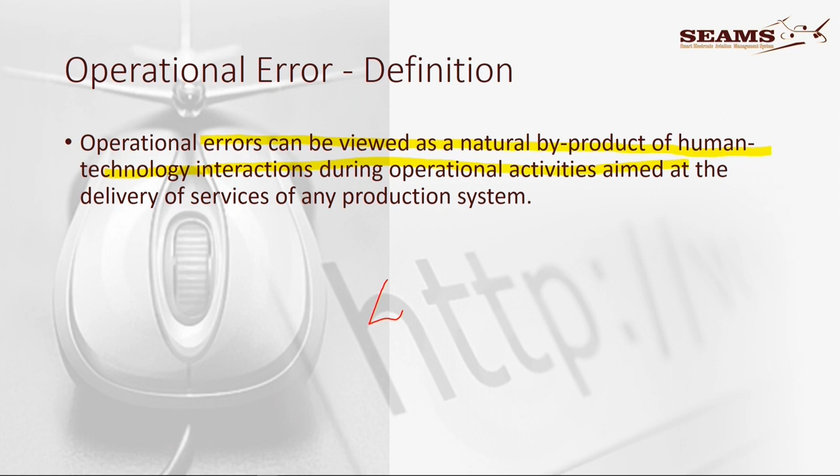Operational error, when I look at what is operational error, can be viewed as a natural byproduct of human and technology interaction. Remember that in the SHEL model, we had the liveware in the center, and we had software, hardware, environment, and then liveware. The interfaces was happening between the center and each part as we go there.

Now remember that the interface between humans, that's obviously the liveware part, and then we put here the liveware part with the hardware part. Hardware part, those are the tools that we've got to operate with on a daily basis.

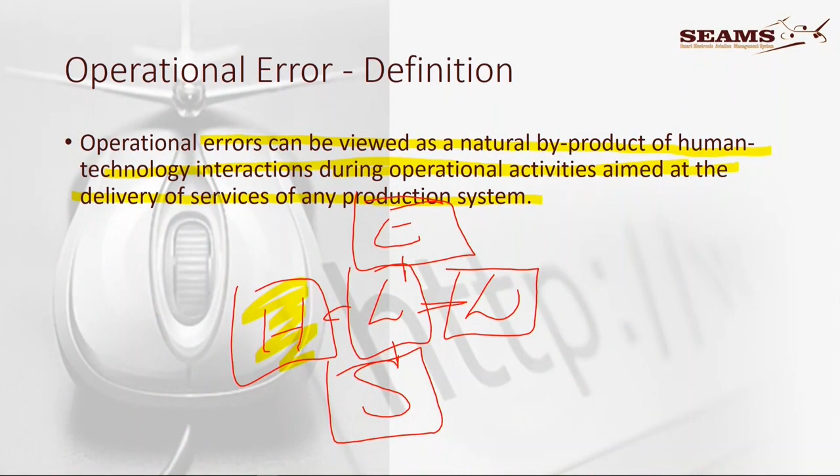And there's a couple of rules nonetheless during operational activities aimed at delivery of service of any production system. In other words, whether that is a production system when we are going out to fly a sortie, or whether it's on the factory floor, it doesn't matter. It is when man and machine, or liveware and hardware, has to interface.

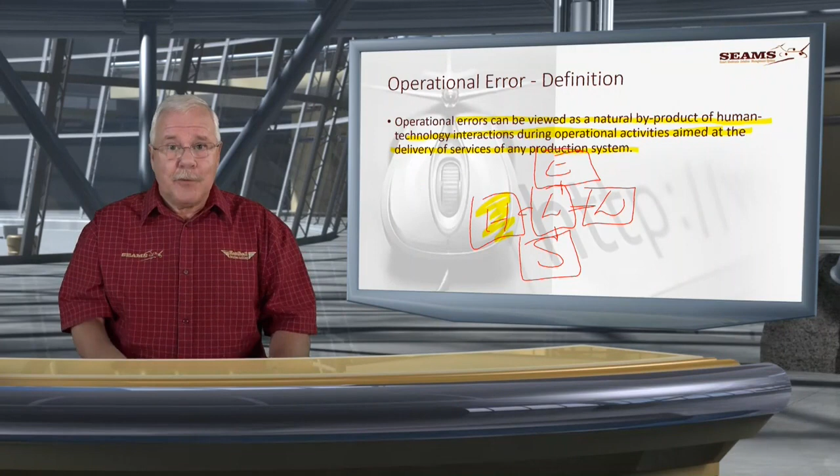And that, by the way, is the origin of human factors. That's where the term human factors was coined, when we said, okay, but why have we got this interface problem? And the only reason we've got that is because we're human. At this stage, obviously saying that there's no other conceivable or technical reason.

Obviously, if there's a technical reason, it could be an error that has happened before, poor, shoddy workmanship, or whatever. Or if for some other reason, during final approach, we don't check that we've got undercarriage, we don't select the undercarriage. And that's the kind of operational error that I would like to talk about today.

The nature of operational errors: just a couple of points, they're accepted as a normal component of any system where humans and technology interact, and operational safety strategies are put into practice to control the operational errors. It's a normal component, and we've got to make peace with it. In fact, there are thousands or millions of operational errors that are made every hour, every day.

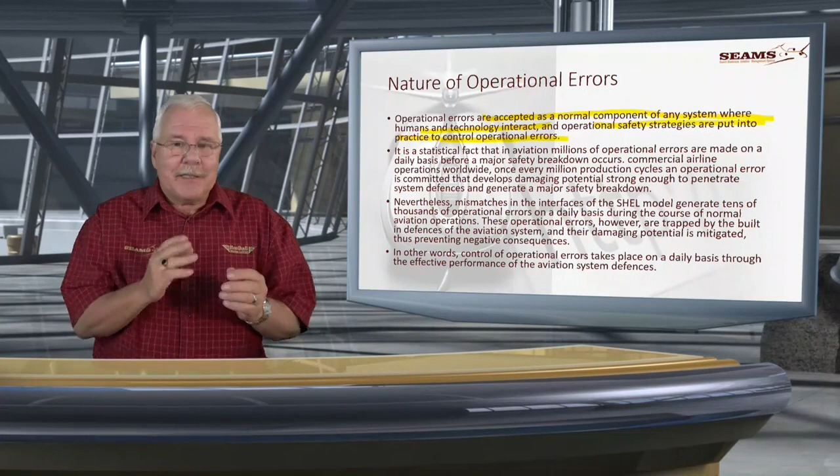Humans, we normally err 1 in 1,000 times. So every 1,000 things that we do, there's something that we have an error on. It's not something that we want to do, it's not intentionally wrong, it's not that we've got a bad attitude or anything. It is just an honest mistake. Those happen quite a lot.

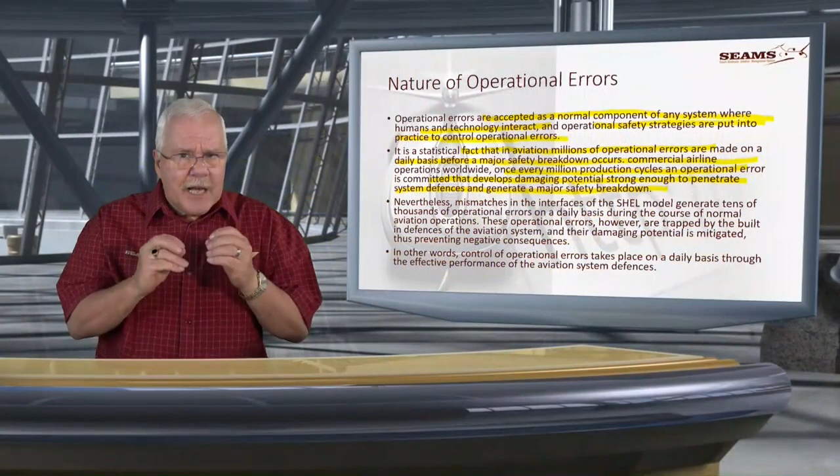So not every operational error will lead to disaster. It might lead to small deviances, small problems, something that can be handled and picked up, something that's not necessarily going to make a change.

But that is the problem. Not having undercarriage selected, well, that is a problem. Not being able to select undercarriage, that's a huge problem. The one is that you know that you're not going to necessarily have undercarriage, and the other one you don't know that you do not have undercarriage. And that actually puts you at a greater disadvantage.

Nevertheless, mismatches in the interface as with the SHEL model, and I've just done that - thousands of operational errors on a daily basis during the course of normal aviation operations. So we make a lot of mistakes. These operational errors are trapped by the built-in defenses in the aviation system, and their damaging potential is mitigated, thus preventing negative consequences. And this is quite important.

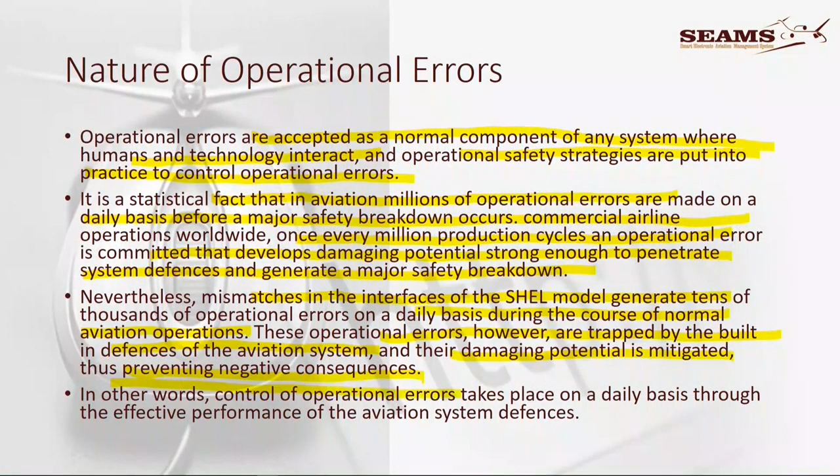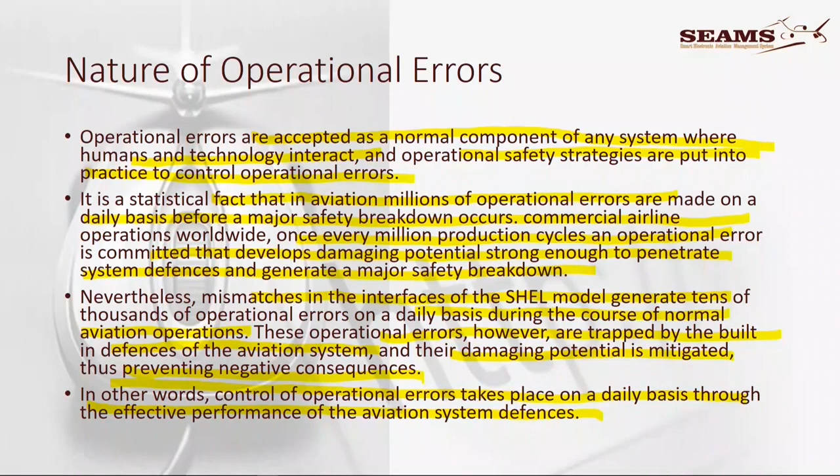Right from the word go, what is it that in the aviation industry we do to ensure that once we've made an operational error, we can become aware of it? Or is there something that can catch that error, confine it, and limit the consequence? That's one of the things we have to talk about. Operational errors take place on a daily basis, and effective performance of the defenses.

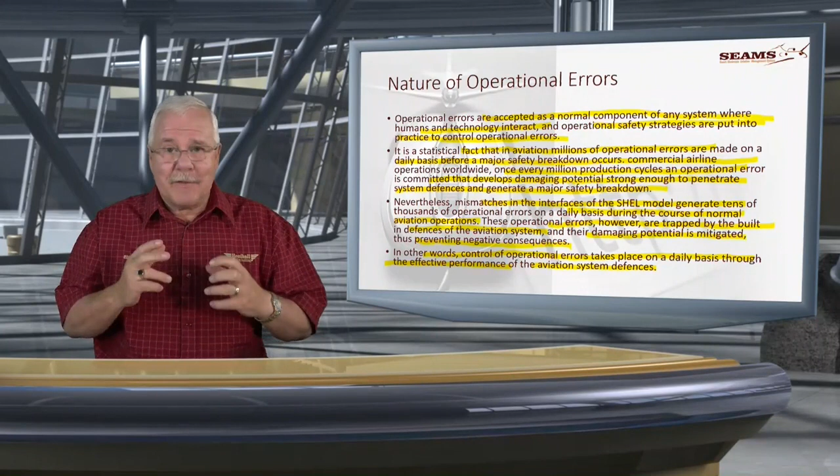The last one we're looking at here says control of operational errors takes place on a daily basis through the effective performance of the aviation system. That is a mouthful. It means that even though the system is effective and we've got the right stuff going, it is very difficult to have any flight operation or procedure without small errors creeping in.

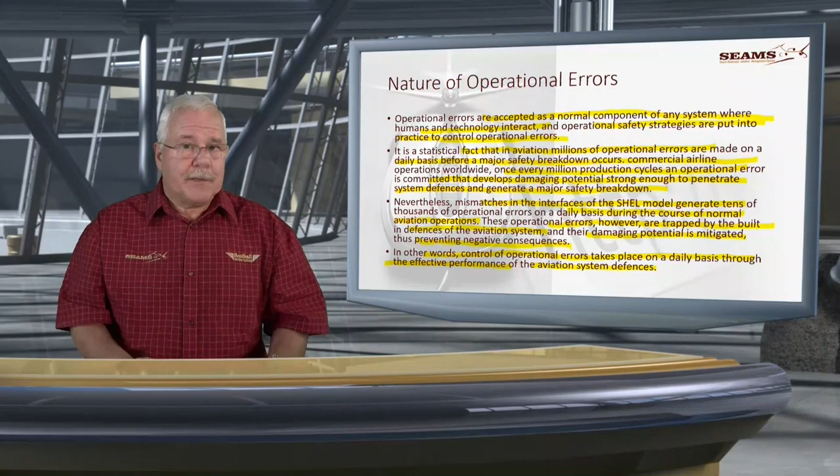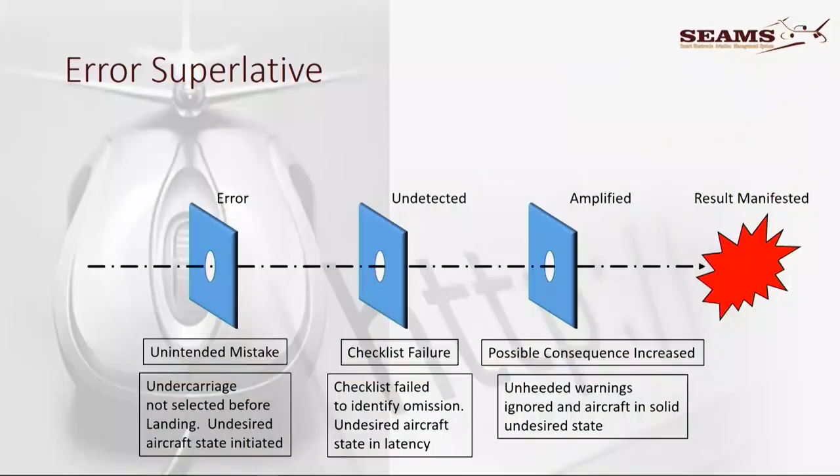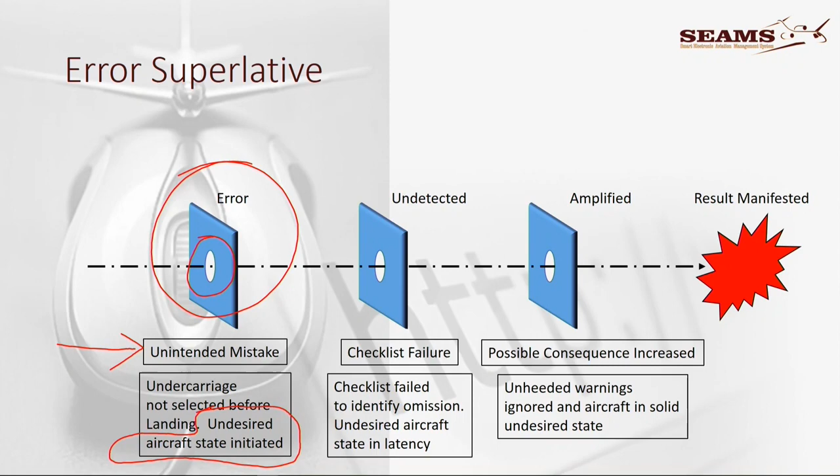Start off with the error. The only reason I've got a hole in the center there is to show that the error was not captured. In other words, there is an unintended mistake. It's not really a transgression. We just forgot to put the undercarriage down, okay? Give me a break. Undercarriage not selected before landing, and that put the aircraft into an undesired state. The undesirable state of the aircraft is now initiated.

Right, so you're sitting on downwind. For some or other reason, you got distracted. I don't know what you were doing, but you just simply didn't select the undercarriage down. You did the rest of the power settings, you put the flaps down, you did everything. You didn't notice that the aircraft was performing a little bit better than normal, because you didn't notice that the reduced drag of the wheels actually made an inch or two manifold pressure difference.

You didn't notice that it made a speed difference, and you didn't notice that you actually used less power. In other words, you are totally unaware. Remember, the moment the error is made, it goes into a latency state - it's lying there dormant. It's not shouting at you, not yet.

Because, having not selected the undercarriage down, you didn't check for the green, and you didn't check for the mechanical indication, or outside, in the Baron's case, where there's a little mirror on the wing to show if the nose gear is out. By the way, all these things are taught. But somehow, for some reason...

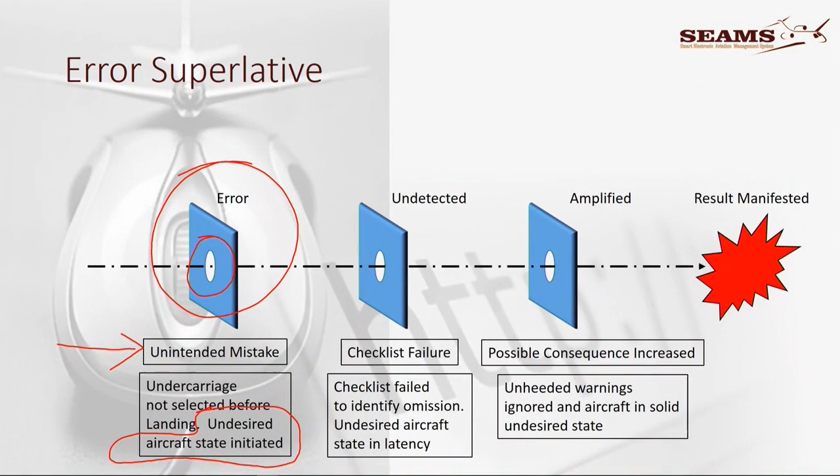The next thing is the error is now undetected. How do we detect errors? Here you can look - I said the checklist failure. Remember that we use checklists, SOPs, not little rhymes. We've got sequences of doing things, and we hammer it into the heads all day.

Every time we fly, this is what you do. On downwind, the first thing is you do your radio call. Next, you set the power. Next, brakes, undercarriage down, and wait for it - cloop, cloop, cloop, 3 greens we've got. Check outside indication, green light, mechanical indication. And now you carry on setting the mixture, the pitch, the throttle for the condition.

So there's an absolute sequence that we follow. It's not a sequence that we follow maybe now and then. Flying does not work like that. The moment you fly and do not follow the absolute sequence anymore, you're looking for trouble.

What makes you so good? Well, all right, never mind.

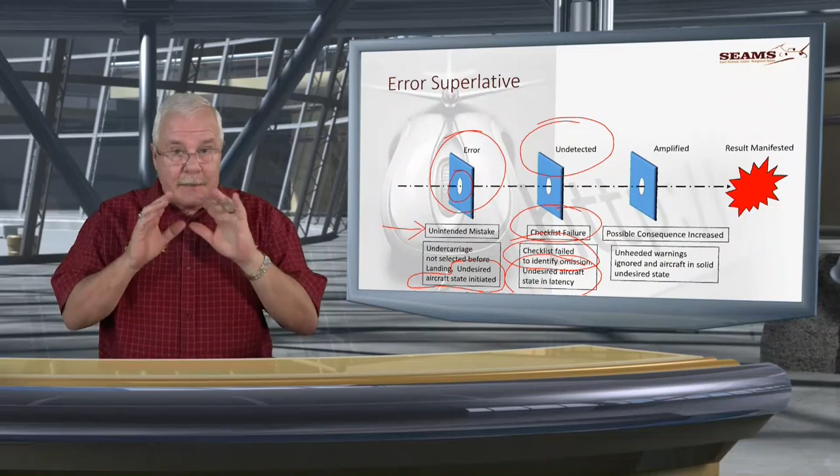Checklist failed - in other words, if we didn't use it, now the aircraft is definitely in an undesired state, and it's getting fully into the latency state. It is now there. The first time you made the error, the second time you compounded the error by not picking it up due to the correct procedures, and then you amplified the problem. What is that? There is a possible consequence that is increased.

How's that possible? You talk here about unheeded warnings. It simply means a warning came into the cockpit. For instance, the red light showing for the undercarriage is an unheeded warning because we didn't pick it up, and the warning is there. Maybe the undercarriage horn is blowing, but you are so distracted that you actually don't hear it.

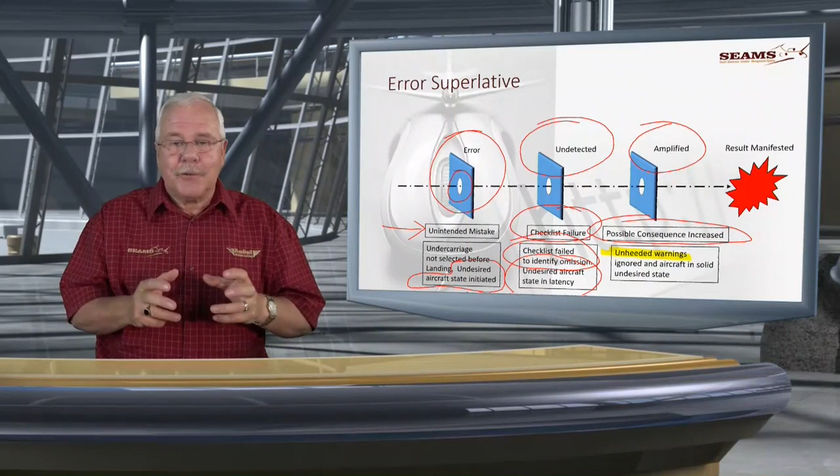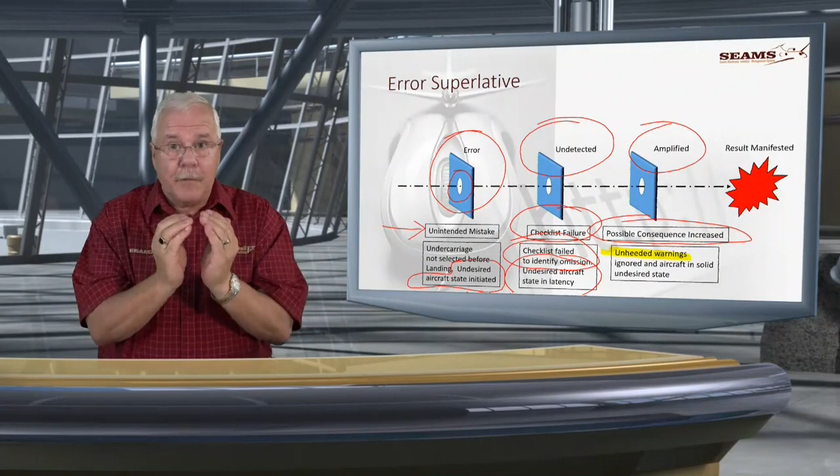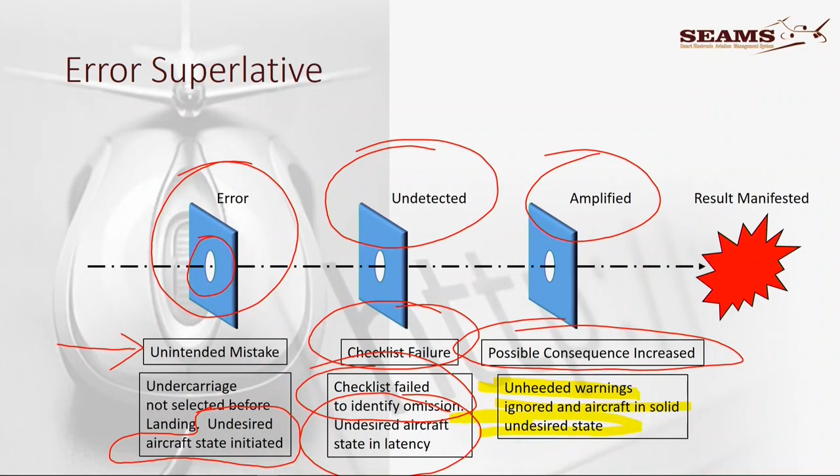Don't even think for a moment that you were created above that kind of mistake. It's simply not true. It is easy to distract someone to the point where, in their peripherals, they don't see or hear, but they are so focused on that which is seemingly important at that moment in time. So it is ignored, and the aircraft is now in a solid, undesired state.

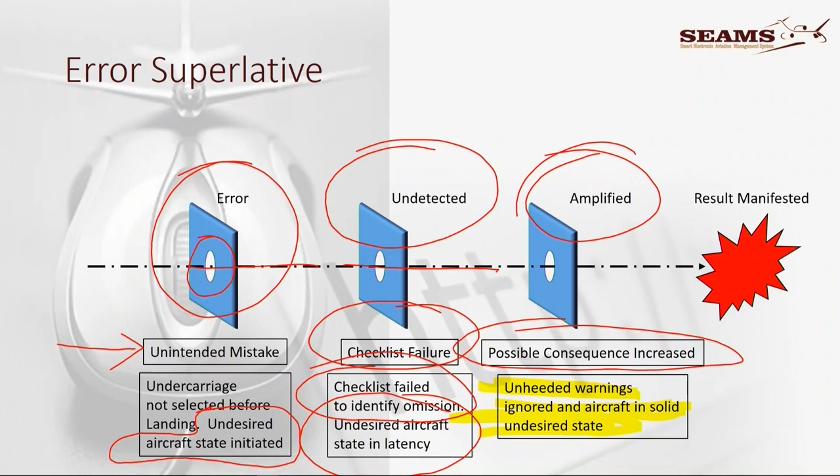Still, if you look right through, it popped through that hole, it popped through there, it didn't stop there, and the things that could have stopped it actually now compounded the problem even further. There's now a certain amount of inevitability to this.

We are now on final approach. We do not see that there's anything wrong. It is undetected, and on we go, and it's now amplified to the level where, remember, at this stage of the game, there's been no consequence. In terms of flight safety, on downwind, on base leg, on final, there's still no problem - until you're going to make contact with Mother Earth.

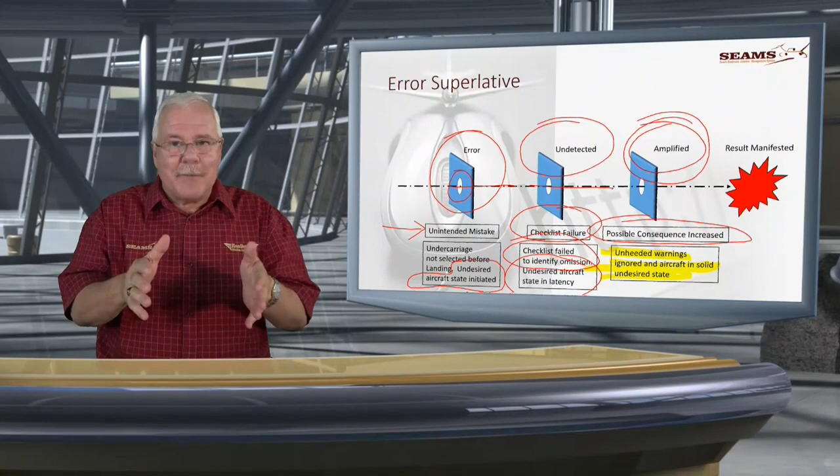So now we just hope and pray that somebody's going to pick up that the undercarriage is definitely not down. I'm not one of the guys listening to the clips on YouTube where you can hear the hooter screaming, but both people are so mesmerized by something that they don't see where they're heading.

All right, if we look at reasons for the error induction, this is where we've got to pay attention, because this is exactly the problem. Distracted attention - and I can tell you now that distracted attention is the number one cause.

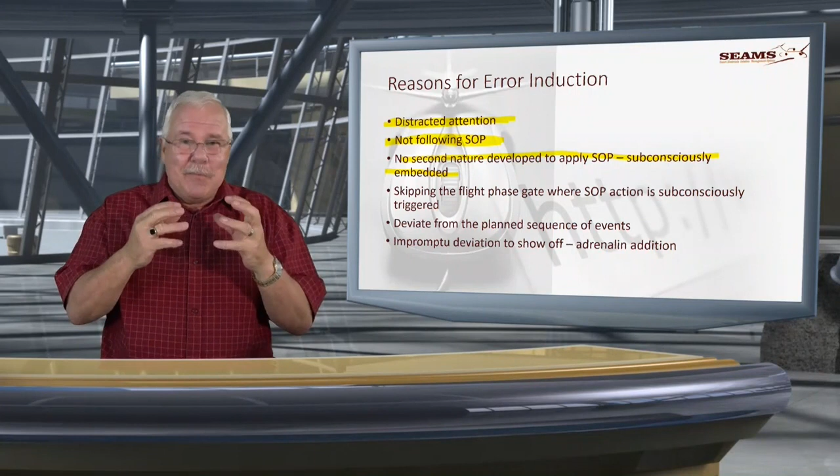Even today in the Harvard, if you wanted to, after takeoff, get the undercarriage up, you would apply the brakes, and then you would have to energize - push down a lever to energize, to get hydraulics into the system, and then undercarriage up. So even today, when I sit there after takeoff, I say brakes, energize, undercarriage - it's 1,800 hours on the Harvards that ingrained that into me. It's difficult for me not to say energize.

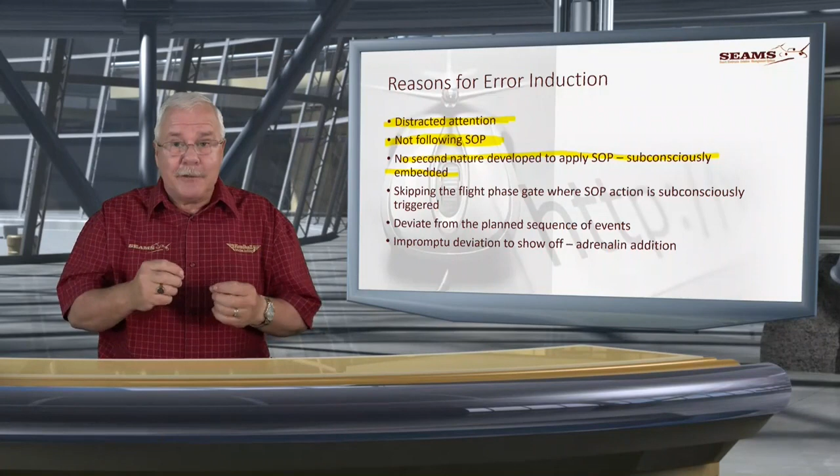It's just ingrained. Now imagine, this luckily is something extra that's ingrained as a single pilot. In a multi-crew, we do call-outs, we do checks, and we don't let it go over just to memory. But in this case, memory is what is happening.

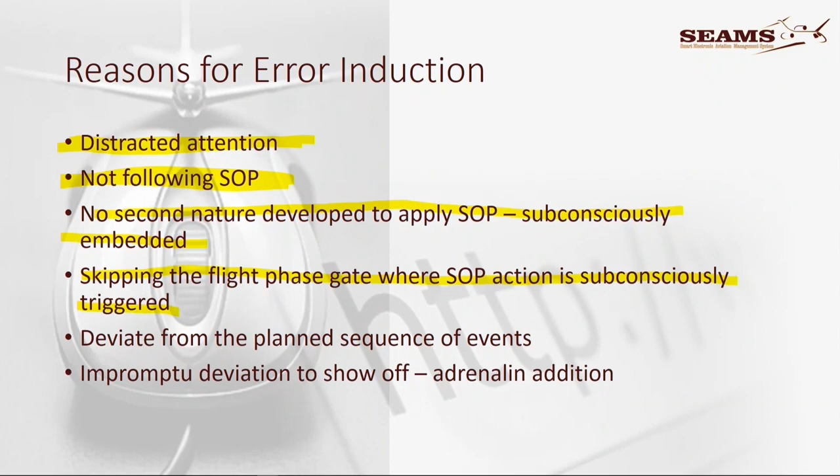Skipping the flight phase - ooh, okay. Now, what is the flight phase gate? When we approach an aircraft, when we approach a runway to land, there are 3 places that we normally join.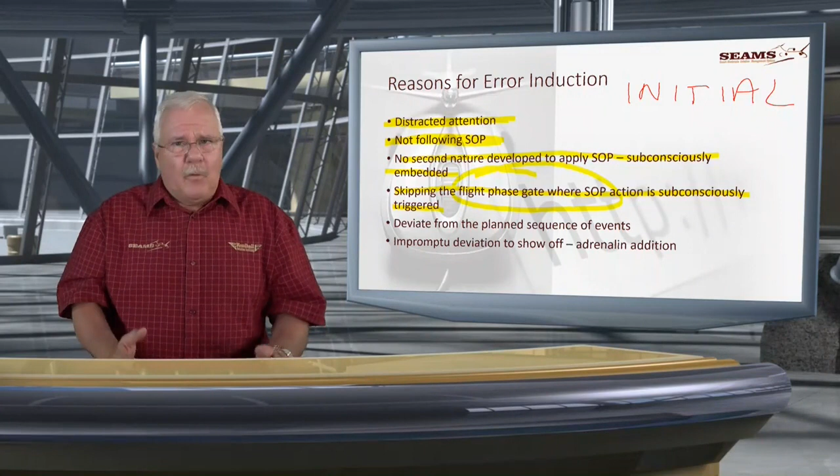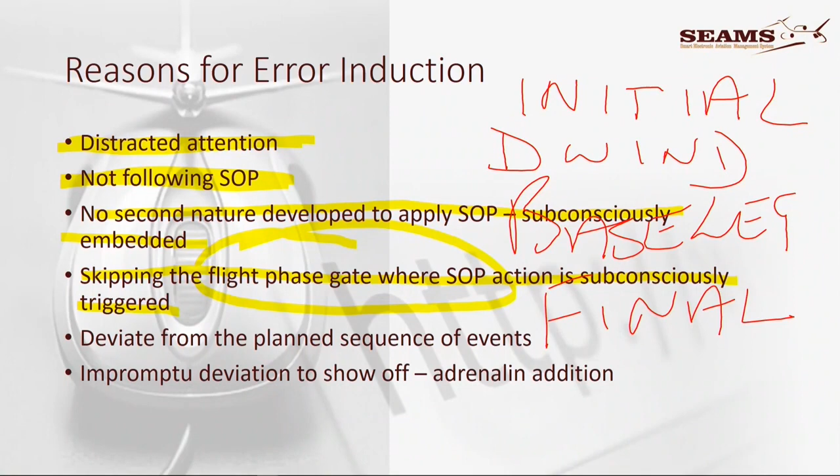Initial is not something we use anymore - well, but what is the unmanned procedure anything else than actually flying an initial? You're flying overhead, checking what it is, and then joining into procedure. So there's the initial, there's downwind that you can join, there's base leg that you can join, and there's the final approach. Now the initial, the downwind, and the final are pretty normal for people to join in those different places.

The thing in your mind is, when you join to land and you're in a certain place, something pops up naturally to say, right, and you start your radio call. Where am I? And immediately, the radio call triggers the brakes on and off, undercarriage selection down, stand by, and wait - and you follow through the procedure. But there is that trigger.

Where is that gate? Now, when we fly in the school environment, or when you fly in a controlled airspace environment, then normally you will join a downwind. And in an unmanned procedure, you'll probably join overhead, and then you will put yourself on a downwind. So downwind in both these cases, they're there. But many, many times, in an airline, or under normal circumstances, we're not going to fly a downwind and a base leg onto final if the flight path is actually taking us straight onto final.

Because time is money.

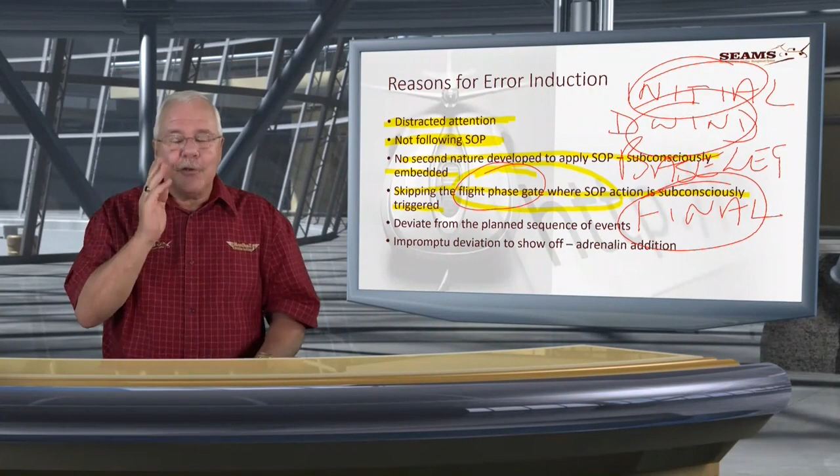So now all of a sudden, we're used to the fact that we're joining a downwind all the time, and all of a sudden, we're not called to do a downwind joining, but a final, straight in approach. Oopsie. Now there's a different flight gate. The flight gate is not initiated by a downwind because it does not exist. So your pre-landing procedures, now it is not downwind procedures anymore. It is now pre-landing. So we keep on teaching going into land, there's pre-landing. But in ordinary cases, we've got downwind checks, we've got base check, we've got final check. And here you've got one long final to do your preparation to land, the checks that you normally would have done on base, and the checks you've got to do on final, and you do that in a straight line. What I'm saying is that it has changed the mindset.

All right, so can you approach in different places? Yes, of course, it's not a problem. But it doesn't matter the time, that gate must trigger so that you do the right things at the right time.

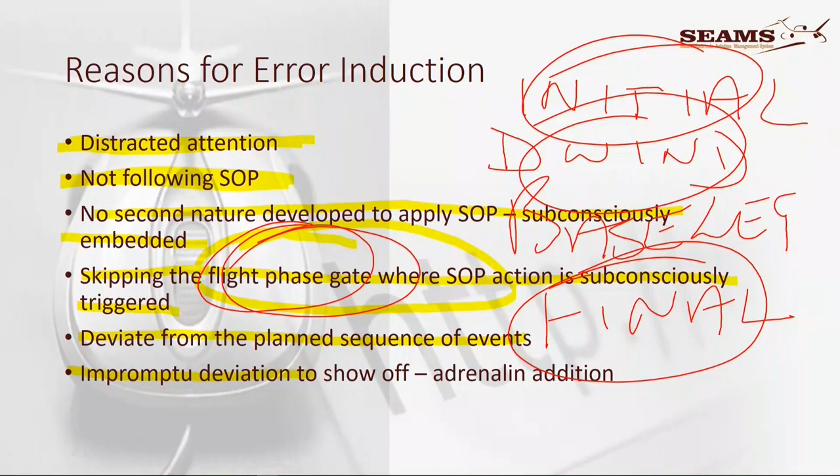Then I said here, deviate from the planned sequence of events, and the impromptu deviations for an adrenaline kick. The moment that you think, I'm going to do a shoot up, and I'm going to just be the man, your heart is starting to pump. There's adrenaline pumping into your veins. And what happens to that adrenaline? Well, let me tell you, it makes you stronger, but it is overwhelming you, because there's nothing that can happen to that energy except to turn into some kind of toxin inside, because you can't quickly run out of the way. But as you say, okay, we're going to do a shoot up, the heart is starting to pump, everything is here, and the excitement is growing, and now you're going in, and as you go in for the shoot up, that is when you actually become deaf and blind to anything in the peripheral. That is what unplanned stuff does to you.

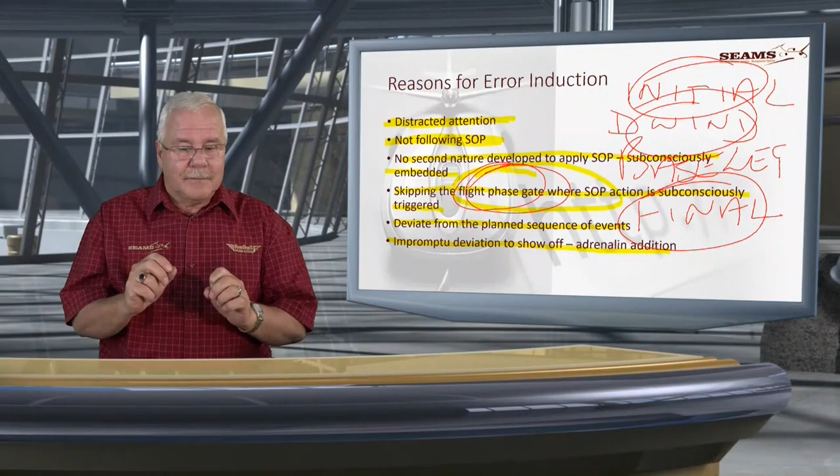Error capturing, let's have a look at that. Man and machine interface needs help to avoid the mismatch, and there's three of them. The first one is technology, standard operating procedures, and training. And you'll say to me, Charlie, but you're repeating it all the time. Well, look, we make the errors, and we've got technology, and we start trusting in stuff so that eventually it is the machine that must do the procedures, and we just become a sort of innocent passenger. Well, if you pilot on your own, you can't become an innocent passenger because it just doesn't fit the picture.

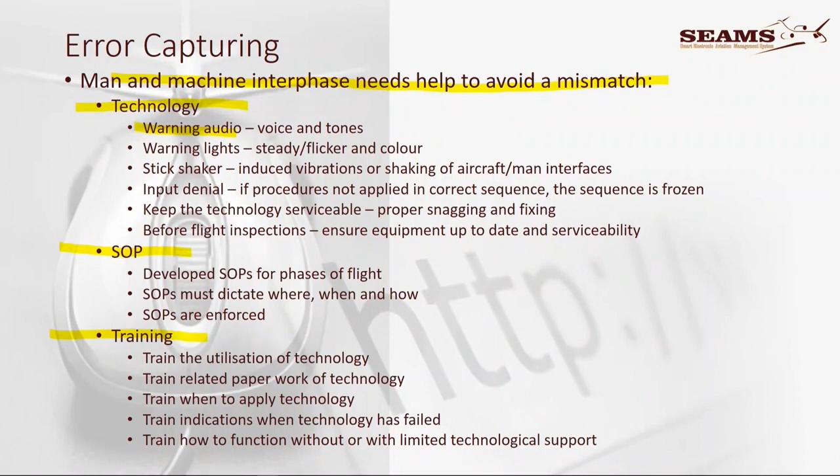But let's have a look here. Technology. There's an audio system, normally voices or tones, warning lights, steady flicker or color, stick shakers, input denial. This is one of the things that happen, if you're out of sequence, the system just won't accept the next step. It is like if you select the flaps down above a certain speed, and some of the aircraft would have the equipment to say, okay, speed is too high, flaps will not come out, and as the speed bleeds below the flap maximum speed, the flaps will start deploying. That's an old trick for the fighter guys, they whip down the flaps, they know nothing is going to happen, and as they come down, the flaps start deploying.

Okay, so there are those things. It's not to say they're going to work. Here is the thing, you must keep, you know what? Yeah, I've got to get a red pen. Keep your technology serviceable. Snag and fix, snag and fix. Listen, you cannot decide after a sortie not to write up the technology problems or failures or whatever.

It's like the undercarriage lights. How do you know the undercarriage is down? How do you know how much fuel you've got on board? No, I checked. Well, did you get a leak? And I don't know, all right? That is why we snag stuff, and that's why we fix stuff.

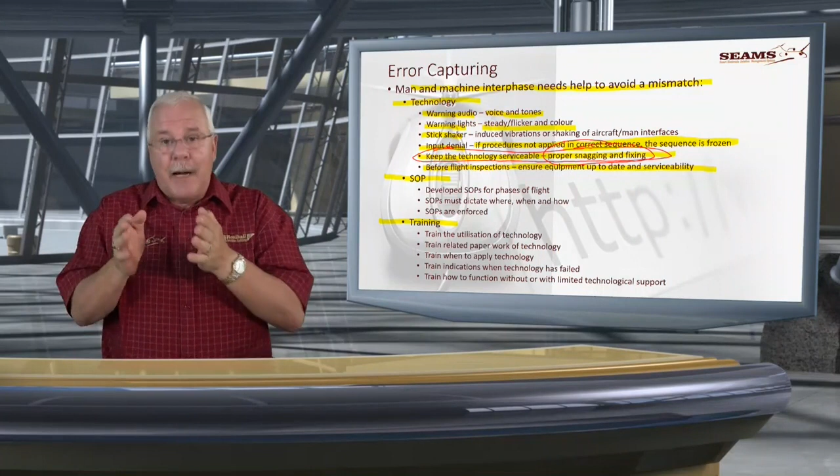Remember, I said the technology - how will you know that it's not serviceable? Well, somebody must tell you it's not serviceable, and that somebody can only tell you by writing it down. You will only know, if you're the next person to fly the aircraft, if you see that. That is why we go to an aircraft and do a pre-flight, and if anything is wrong on that aircraft, any damage or anything detected, it is blamed on the guys before that sortie.

Every time. Yeah, but I don't know if that problem existed for the past 15 hours or 20 hours. It doesn't matter. The fact is that I picked it up now. So the only person I can hold liable for it is the one that last flew the aircraft.

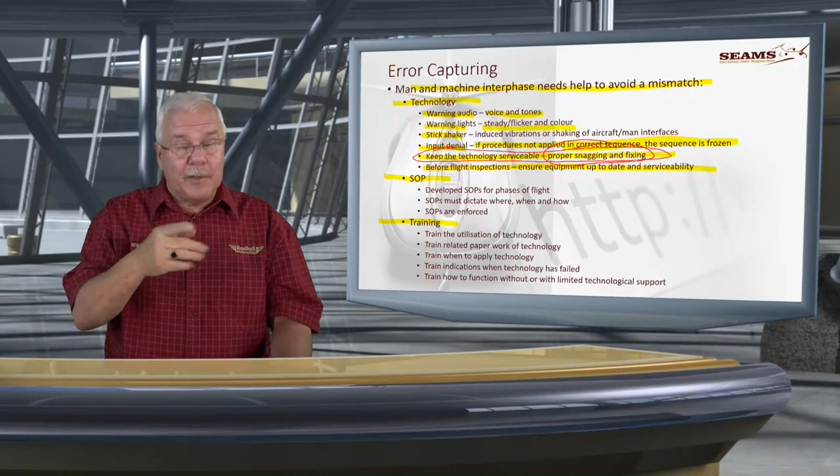By the way, that's why we do afterflights. And don't think if you pick up on an afterflight that there's something wrong, the next guys won't pick it up on the pre-flight. You're just damn lucky if they don't, all right, and it could then be blamed on... then it's going to be blamed on you because you're the next one that's going to fly. A little bit of a problem, eh?

SOPs - now, the capturing we've got through technology, but remember now we need SOPs. SOPs must be developed for the phases of flight. It must dictate what, where, when, and how, and the SOP must be enforced.

Now, I just want to put this here, because who enforces the SOP? Really, am I sitting there every sortie looking over your shoulder, what are you doing? Oh, come on, I haven't got time for that. Eventually, you're going to have to be on your own. And if you cannot enforce doing the right thing by yourself, you just became another rogue aviator, all right? And you will pay for it, I promise you. Few to no people walk away.

There are certain things that... look, when we teach people how to interface with machine, why do we do procedures? It's to avoid interface errors. Why do we do procedures on base leg again? To check if we did the downwind. Why do we redo the final checks? To check that we've got the undercarriage, we've got the flap and everything. Why? Because we're following the SOP. We check it - what is that to do?

That is to capture. But if you do not follow the SOP, it cannot help you. It cannot help you. It's meaningless because it's something on a piece of paper. I can give you the piece of paper, I can teach you to use the piece of paper, but I cannot force you to use the piece of paper.

Training - train utilization of technology, train-related paperwork of technology. When do we apply the technology? Indicators when the technology has failed, how to function without or with limited technological support.

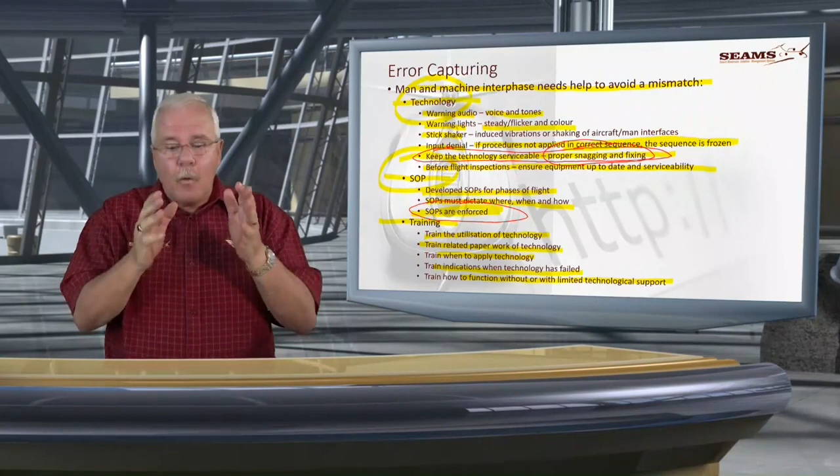So if I haven't got undercarriage down, it will mean that the power settings that I'm used to will now be too much for the normal speeds. There's a deviation. So I need you to get into the cockpit and start observing exactly - if you fly the same aircraft, the same type of aircraft all the time, if I set this power setting, what speed do I get under certain configurations? These with flap down, these with undercarriage down, and what is it that we get? And then we use that as baseline.

The moment that we know, in other words, we've got pre-knowledge, and we say, hey, this is strange.

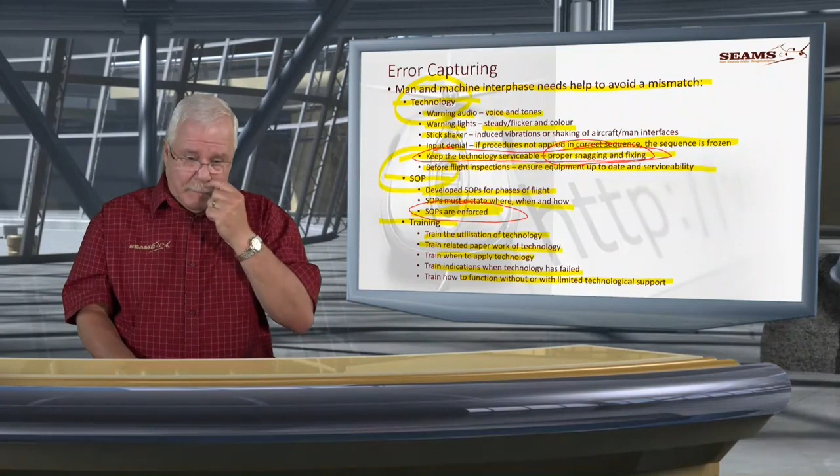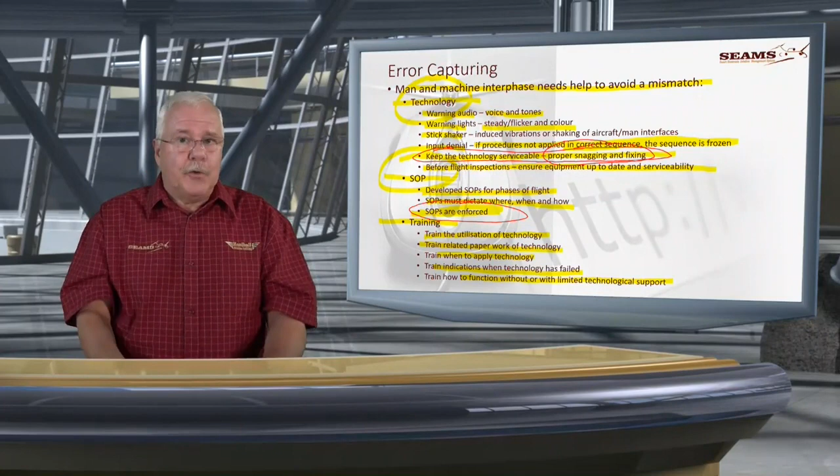Normally I need 22 to 23 inches to maintain, let's say, 90 or 85 miles per hour. But all of a sudden I see, wow, I only need 20 inches, or whatever the case might be. That is where we've got the problem. All of a sudden we need less. Then there's something different, because the drag that you've got at that moment in time will automatically lead to how much power you actually need at the end of the day.

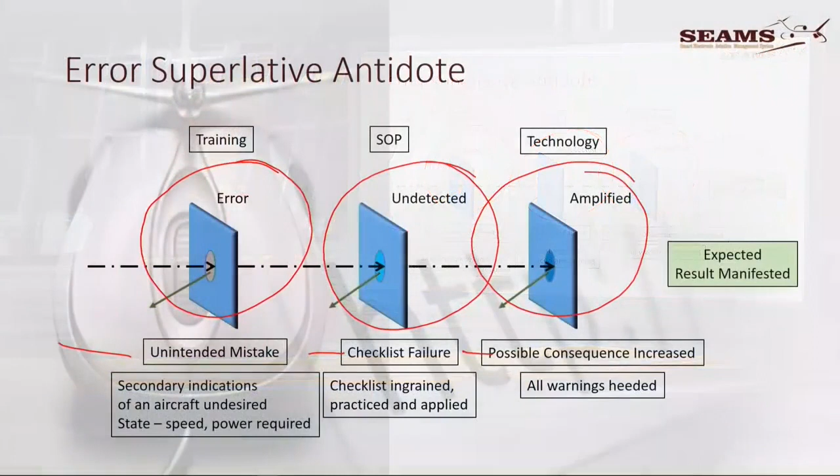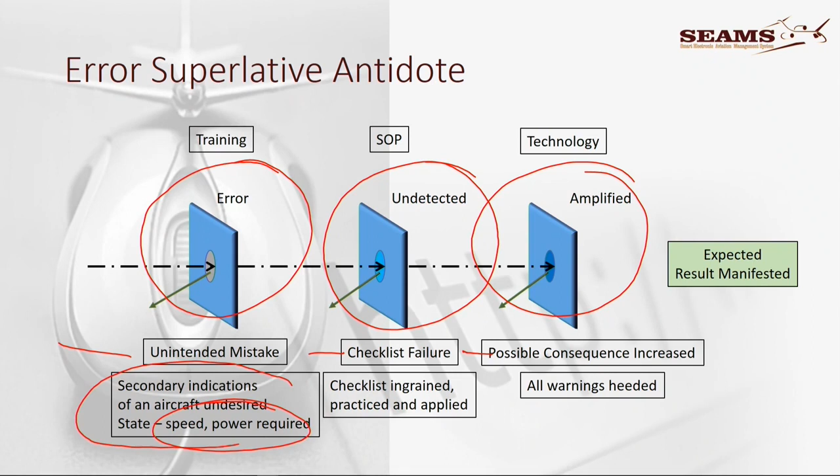Now remember the antidotes we're looking at: the secondary indications of an aircraft undesired state, such as speed, power required, and so on. If these secondary indications trigger that to you, then obviously it'll bounce away and the sequence will stop there.

But let's say it checks through, and now you get the checklist. It's ingrained, it's practiced, it's applied, it is all over the show. And if you now apply it, you pick up, oh my goodness, I haven't got undercarriage, whip it down, and everything stops there.

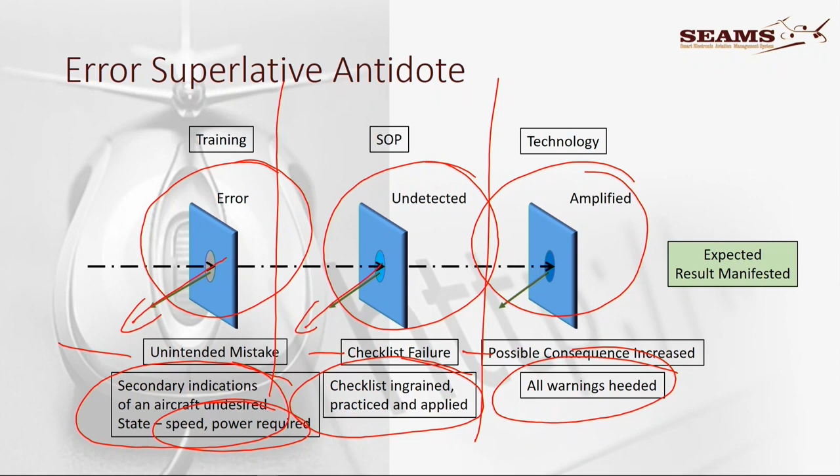Now, in the last case we're talking about, where we say that hooter that I snagged and is fixed now, that hooter started blaring in my ears, and the red light shone in my eyes, and all that, and I heed to the warnings, and it stops there, and the result is as expected: a good end result.

Is it really as easy as that? Because remember, here I say you've got to train, you've got to work your SOPs, and you've got to have your technology. Now, where the technology is going to come in is here, the SOPs will come here, but where do we start to develop error capturing skills? It's under the training.

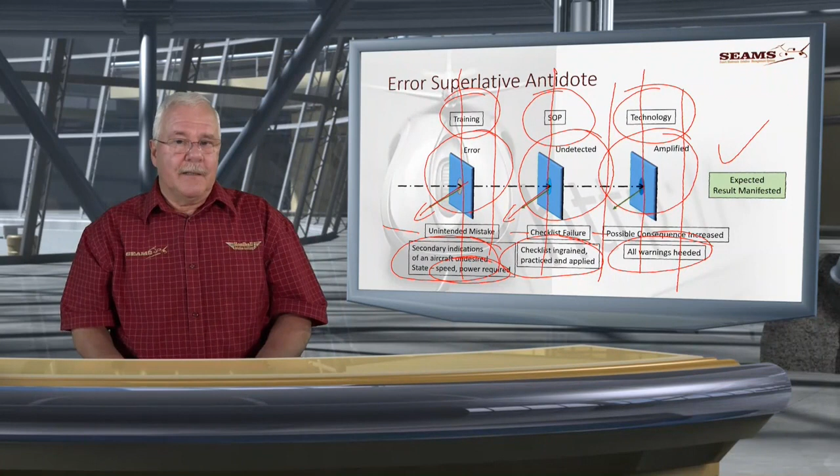It's in this case. I know this thing is so full of blobs here, so I can just do that, and voila, it's ready again.

So technology, but if technology fails you, then you can't go beyond that point. So now, all of a sudden, the SOP is actually the only key here between the error and the expected end result. It's the SOP.

Yeah, but we haven't got SOPs. Then make SOPs. Yeah, but this... Stop yeah-butting. All right? The fact is, get your SOPs triggered, do the SOP, get into there, because that is to save the day.

How do we get that ingrained? We learn, we teach, we enforce, and then we wean you, and at the end of the day we leave you. And then, hopefully, you're not going to screw it up.

But what will lead you to disaster is to not follow the recipe. If you want the same chocolate cake, you must use the same recipe every time. You cannot get into the madness loop of changing the ingredients and hope every time to get exactly the same end result.

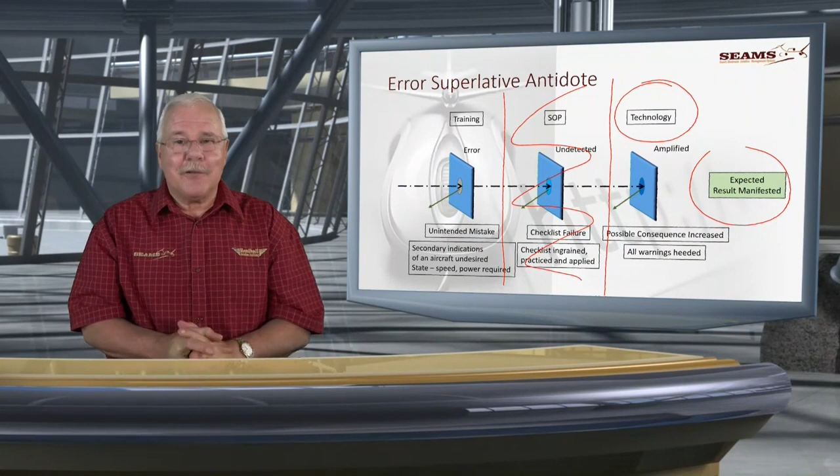Or, alternately, as our clever learned friend said, who discovered E equals MC squared, when he said that you have the same ingredients but expect a different result - it's not how it works. Ingredients equals results, period. Yeah, but I'm better than you.

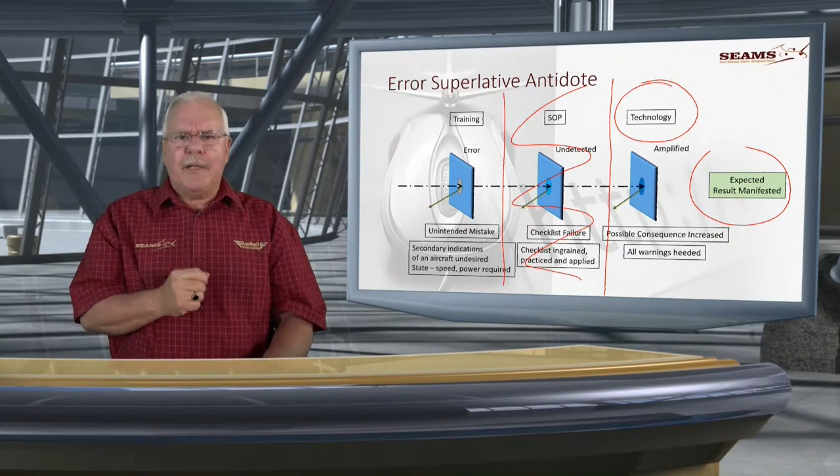It's got nothing to do with you and I. Whether you're better than me, that's fine, I accept it, you're better than me. But none of us are bigger than the moment or the SOP at that specific point in time.

Oh, okay. And there in the back, I think I recognize Leonard Hawkins there.

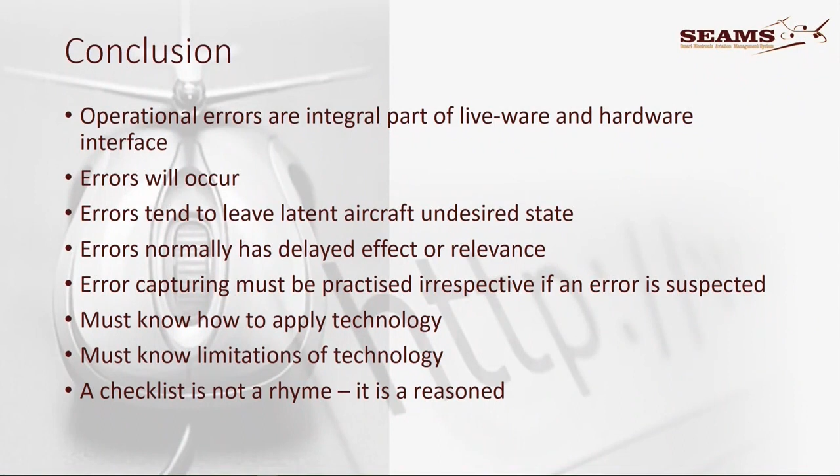Conclusion. All right, so let me get it here. Operational errors are an integral part. We now know that. Errors will occur. Errors tend to leave a latent aircraft undesired state. That is a fact.

Up to now, you make an error, it's an honest mistake, it's going to happen. It's just the natural world that we've got to interface with, and we're going to end up in an undesired state. The next reality is that the error normally has a delayed effect, or its relevance is delayed.

It's not to say that it's going to happen right now. If I don't put the undercarriage down, nothing's going to happen right now. It's going to happen by the time you get at a height lower than where the undercarriage normally would have touched the ground. Not much lower, maybe that much lower. Then the propeller's going to start eating.

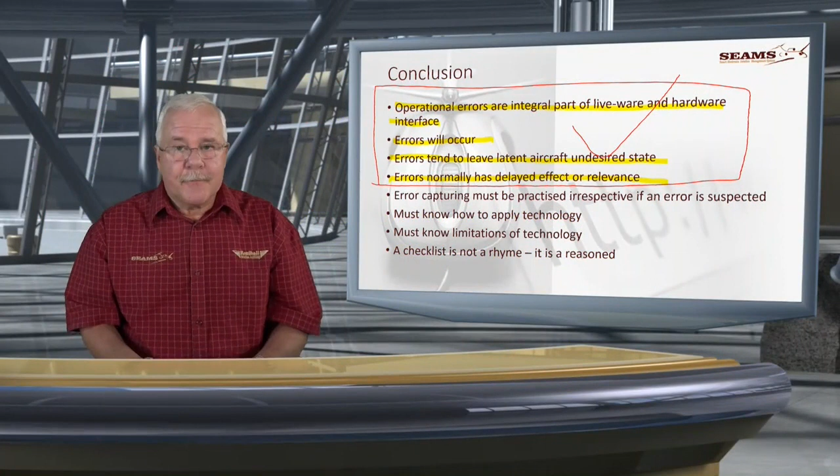Okay, so error capturing - that is why up to that point that will happen. That is bound to happen. No amount of training, no amount of whatever can basically stop that.

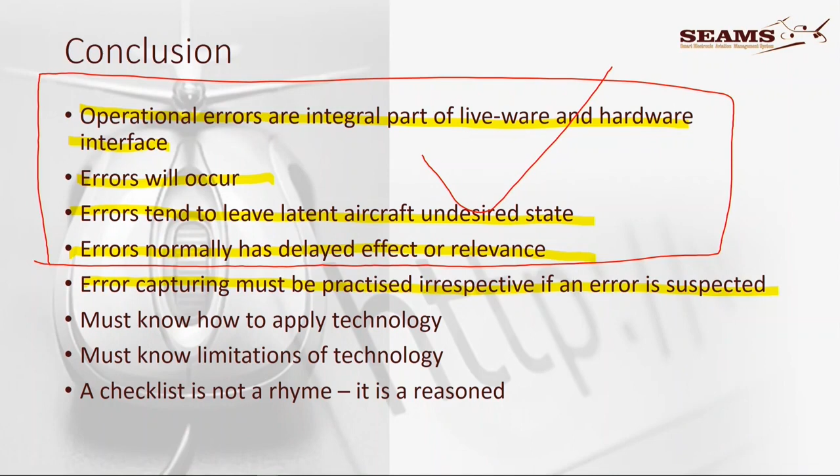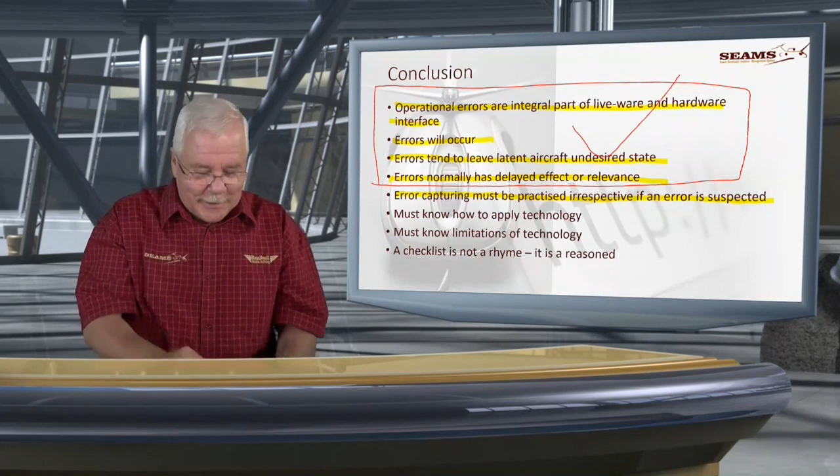But how we capture our errors and how we become aware of our errors, that is the key. So let's look at error capturing. It must be practice, irrespective of whether you suspect an error or not, you do the error capturing. Error capturing is easiest if it's non-technological - remember, the error is the first phase, and in the center we've got the thing that can help us make it or not make it, the SOP.

You must know how to apply, must know the limitations of the technology. The checklist is not a rhyme, it is a reasoned response. It's a reasoned barrier between error and fatality - well, eventuality, it doesn't have to be fatal, but it's the thing that protects us in the center.

So yes, we can put in all the technology in the world. You had the best radio altimeter, but you were never taught how to use it, never taught the standard operating procedures of utilizing it, when, where and how. So when you started doing your low flying over the dams, you touched the water and that was the end, and now you are dead.

And then I say to him, guys, remember, there's a reasoning behind this. You must know how it works, when to work. So we've got the technology, but before we can use it, we must be capable - not just capable in any or every way, but capable to use it according to a specification.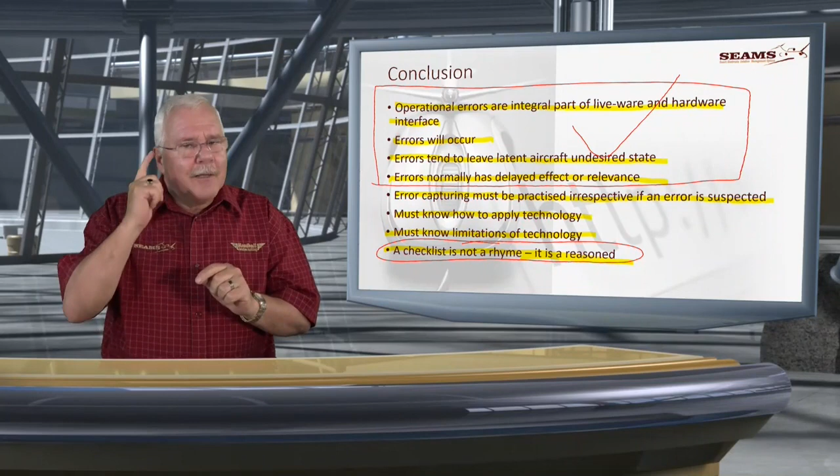Listen now, you can't wait to say 'if all else fails' - then you are going to fail. Because in flying, it's not then the time to discover, oh my goodness, maybe I should have. Those are normally the last things that might go through your mind before something else goes through your mind in a quite gruesome manner.

Am I trying to put this operational thing and the error in a negative phase? No. Get used to it. The operational error, the interface error between man and machine, between liveware and hardware, is going to be there. Period. Get used to it. Suck it up. I nearly said use it or lose it.

I don't want you to lose it, because that's why we're talking to each other. But this must trigger your mind to say, all right, now we know the errors, and how do we capture errors? How do we oversee ourselves? The primary one will be the SOP.

If you follow the SOPs, you'll also find that your technology will help you in a big way. But if you do not use the SOP and you solely rely on the technology, you might get a nasty surprise. Now, the whole idea about flight safety is not to scare the whatever out of you.

The idea of flight safety is for us to get into a place where we can actually enjoy flying. So, I'm going to do an aerobatic sortie. What do? No, I do HASELL checks. Really? Yes. When? Every time. And then? Well, then I enjoy the aerobatics. But I know the aircraft configuration is right. I know that the settings are right. I just don't bomb in there.